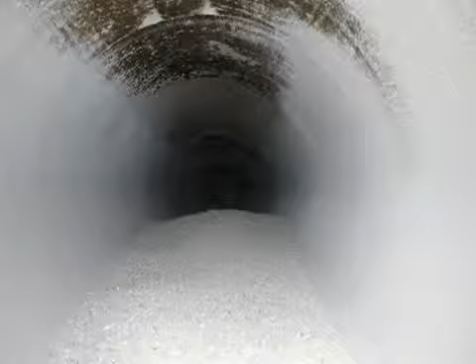Combustible dust fires and explosions continue to occur frequently, fueled by accumulations of combustible dust, which can gather over years in hidden places or in plain sight.

No company wants to see its facility blown up and destroyed and its employees killed, but they just don't understand what the hazard is. They don't realize that they have a hazard here until that one day when the explosion occurs, and it's a terrible tragedy for them. And they look back and say, if we'd only known.

When Tammy Miser got a phone call late one evening in 2003, she worried it would be about her brother, Shawn Boone, who worked at an automotive parts factory. We usually didn't answer the phone that late, but we knew when it kept ringing that there was something wrong, so we answered it.

There had been an accident there before, so I knew. I knew if they were calling me, it was my brother.

Shawn Boone was a mechanic at the Hayes Lemmerz plant in Huntington, Indiana. The company produced aluminum car wheels.

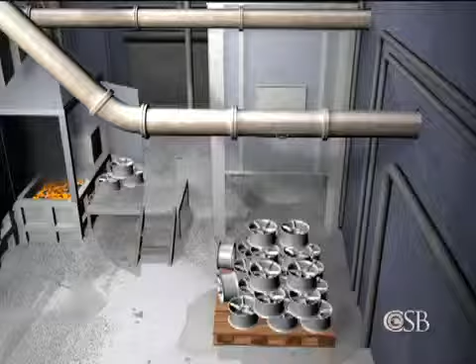The process of finishing the wheels left behind aluminum scraps, which were chopped into small pieces and sent to a furnace to be melted and reused.

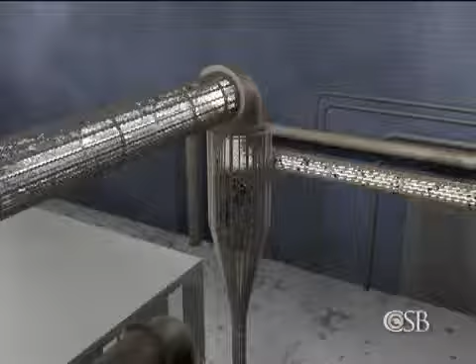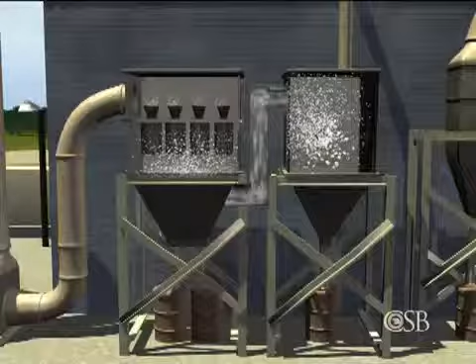Chopping, drying, and blowing the dry chips through the transfer piping created highly combustible aluminum dust, which flowed through ducting to a steel drop box outside the building, where large particles were trapped. The air then entered a dust collector, which removed finer aluminum particles.

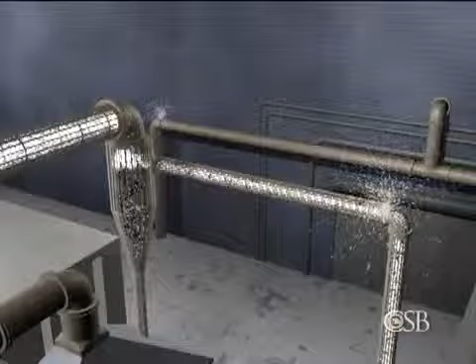Over time, aluminum dust accumulated inside ducts. In addition, there were leaks in the piping used to transfer aluminum chips, which caused dust to build up on surfaces throughout the furnace area. Aluminum dust landed on beams, ledges, and equipment. In some places, the dust was several inches deep.

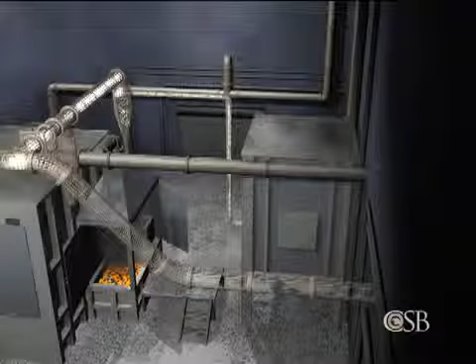On the night of October 29th, about 10 minutes after workers started the aluminum chip melting process, aluminum dust inside the dust collector was suddenly ignited, perhaps by a metal ember or impact spark, resulting in a large explosion.

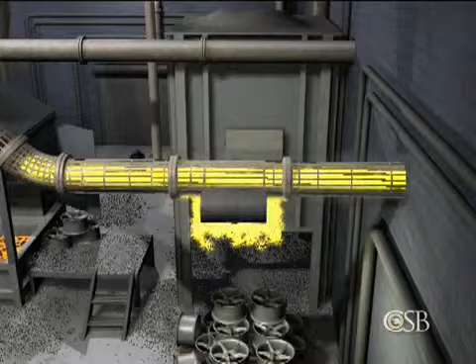The blast propagated back through the duct into the steel drop box, blowing it apart. The fireball and pressure wave continued back through the duct system into the building, gaining intensity as the accumulated aluminum dust ignited.

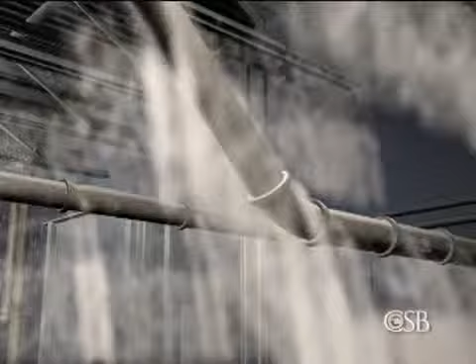The violent disturbance shook loose dust that had built up on external surfaces. At about 8:30 p.m., plant mechanic Sean Boone was one of several workers in the area of the furnace.

Without warning, a fireball erupted from the furnace, engulfing the area and igniting airborne dust in a second, larger explosion. The explosion blew a 50-foot wide hole through the roof of the building.

Co-workers found Sean Boone lying on the floor near the furnace, gravely injured. He was rushed to the hospital and put on life support.

And they told us that his internal organs were burnt, and they could take his arms, and they could take his legs, but he probably wouldn't make it, and it would just prolong it. So we went ahead and took him off.

Sean Boone was one of 14 dust explosion fatalities in 2003 alone.

Launching a comprehensive investigation into the hazard, the CSB held 2 public meetings, convening panels of experts and listening to extensive public comment. First, combustible dust is a real serious problem in all of general industry.

The CSB report concluded that good engineering and safety practices to prevent dust explosions have existed for decades, but there is no comprehensive federal standard requiring adherence to those practices. And many companies are not taking effective actions to control dust hazards.

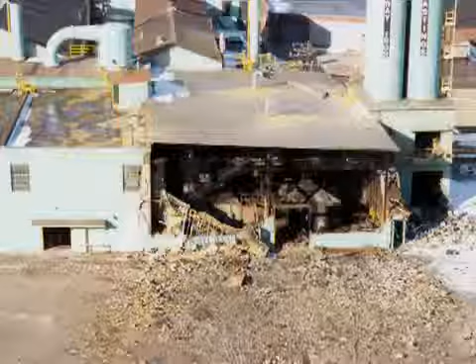Resin dust exploded at the Jahn Foundry in Springfield, Massachusetts in 1999, killing 3 workers and injuring 9 others. Rubber dust exploded at Rouse Polymerics in Vicksburg, Mississippi in 2002, leaving 5 dead. A nylon fiber explosion destroyed Malden Mills in Methuen, Massachusetts in 1995.

In fact, between 1980 and 2005, the CSB found at least 281 combustible dust fires and explosions that caused 119 deaths, 718 injuries, and major damage to industrial facilities.

Amy Beasley Spencer is a combustible dust expert at the National Fire Protection Association, or NFPA. Beyond the loss of life and the injuries, when you think about the economic impact of a dust explosion, you hear about plants being completely destroyed. There's loss of jobs. It's an economic impact on the entire community.

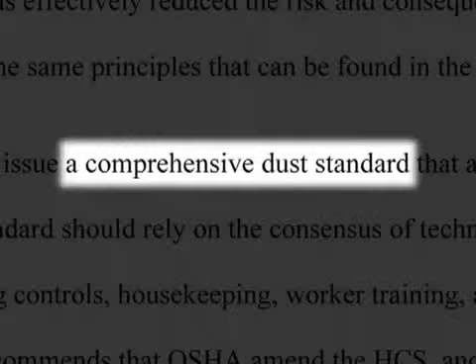The CSB report called on OSHA to establish a comprehensive regulatory standard designed to prevent dust explosions in general industry. The board said OSHA should base the new regulation on the current standards of the NFPA. These codes address hazard assessment, engineering controls, housekeeping, building design, explosion protection, operating procedures, and worker training.

The NFPA codes and standards have been in existence since the early 1920s, and there are 7 codes and standards that deal directly with dust. It's a tragedy to have even one loss of life because the technology is out there to prevent these dust explosions. In addition to the NFPA, the Center for Chemical Process Safety, as well as a leading insurance company, have developed recommended practices on controlling combustible dust.

The board also called for improved training of OSHA inspectors to recognize dust hazards. Interim CSB Executive William Wright explained the recommendation before the House Committee on Education and Labor in March 2008, citing 3 dust explosions the CSB had investigated in 2003.

State OSHA officers had inspected all 3 facilities prior to the accidents, but the dust hazards were never recognized or cited. Furthermore, the CSB determined that all 3 explosions could likely have been prevented if the facilities had implemented NFPA recommended practices.

In addition, the board recommended that OSHA revise its hazard communication standard to ensure that material safety data sheets better communicate dust hazards to workers.

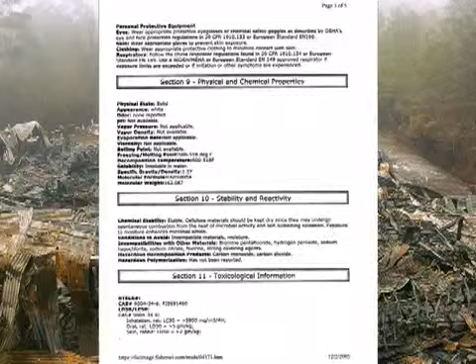In response to the CSB's recommendations, in 2007, OSHA increased the enforcement of existing regulations through a new national emphasis program on combustible dust. Without a comprehensive standard for combustible dust, it's difficult for businesses to know which specific NFPA provisions or other requirements they may be subjected to.

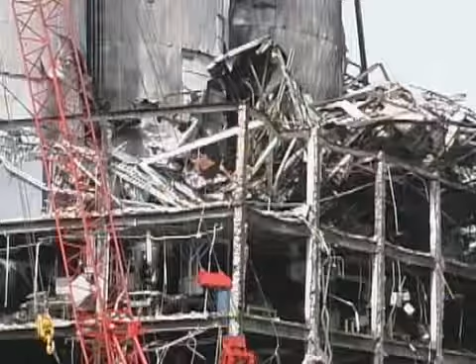The explosions, tragically, continue. The list includes the blast that crippled the Imperial Sugar Refinery outside Savannah, Georgia, in February 2008. Since 2005, about 70 additional dust explosions have been reported. And in fact, the Imperial accident last month is the deadliest industrial dust explosion in the United States since 1980.

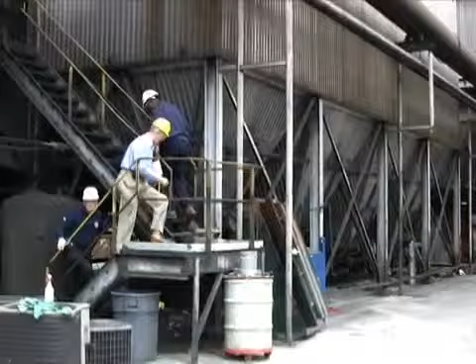CSB Chairman John Bresland: I toured the facility about 6 weeks after the explosion. The damage that was done there was catastrophic. As you walk around the facility, you think of the people who were working there that day, who were killed and severely injured. It was a difficult experience to walk around that facility. It was a very sobering experience.

What is so frustrating about dust explosions is that they're so preventable. And I believe that one of the reasons that dust explosions continue to occur may simply be a lack of understanding about the materials.

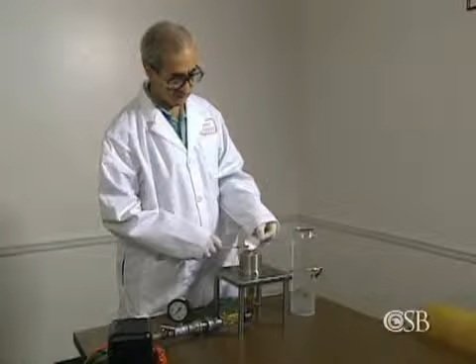Most solid organic materials will explode if the particles are small enough and they're dispersed in a sufficient concentration. Some of the materials that could form combustible dust, and there are lots of them, could include coal, sawdust, food products like sugar and flour, pharmaceuticals, many chemicals, and even many metals.

Like all fires, a dust fire requires fuel, oxygen, and an ignition source. A dust explosion requires two additional elements: dispersion and confinement.

The CSB commissioned laboratory tests using a sample of fine polyethylene dust found by investigators in the rubble of a North Carolina factory. Dust is dispersed into a flame, creating a fireball.

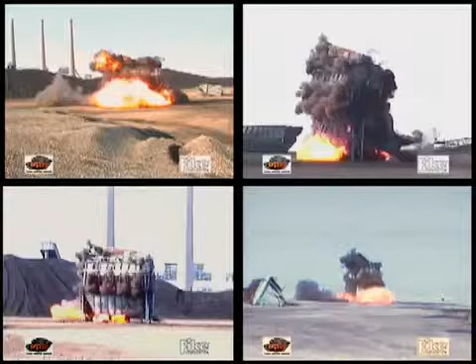When the dust is confined within a structure or a piece of equipment, a powerful explosion can occur and propagate, as this coal industry video demonstrates.

Dust may accumulate on surfaces and lie undisturbed for years. Then some initial fire or explosion, known as a primary event, shakes it loose and ignites it. It causes a pressure wave to go through the plant, dislodging dust that has accumulated unknown up on the rafters, on the beams, on the tops of equipment, serving as fuel.

Most of the fatalities and the devastating injuries have been caused by these secondary dust explosions.

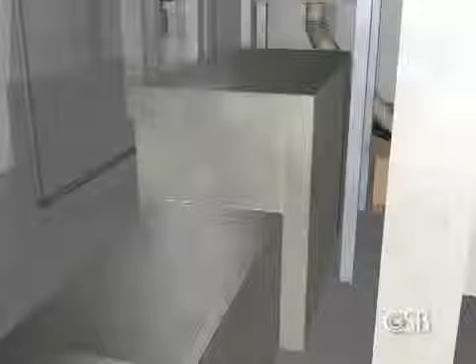According to the NFPA, a catastrophic explosion can occur from as little as 1/32 of an inch of accumulated dust, around the thickness of a dime, covering just 5% of a room's surface area.

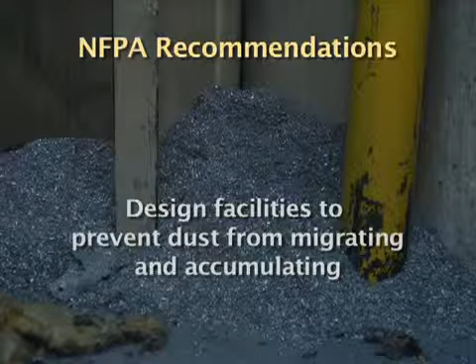The NFPA therefore recommends that companies control fugitive dust emissions, design facilities to prevent dust from migrating and accumulating, and perform rigorous housekeeping to remove any dust that does build up. The NFPA codes have been adopted either at the state level or in some cases at the local level, at the city level. But the problem is they're not enforced in any regular way.

A catastrophic dust explosion at the West Pharmaceutical plant in Kinston, North Carolina in 2003 reveals what can happen when companies do not properly assess the hazards from combustible powders and do not design their buildings and equipment appropriately.

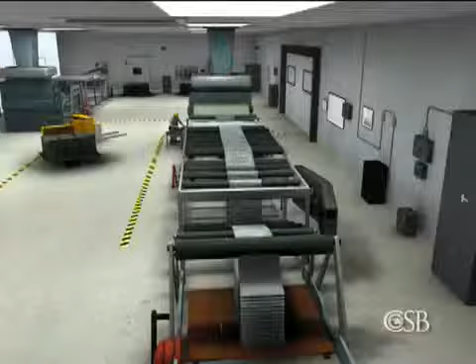West Pharmaceutical made small rubber medical products, such as syringe plungers and stoppers, at a large manufacturing facility with nearly 300 workers. In the process, large batches of rubber were compounded and rolled into long strips.

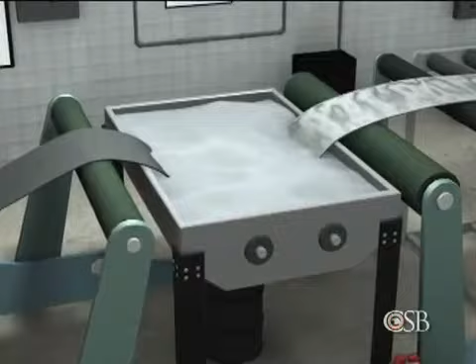To keep these strips from sticking together, they were dipped in a vat containing a whitish slurry of water and finely powdered polyethylene, a petroleum-based wax-like plastic. The coated rubber strips were then blown dry with fans and folded for later processing.

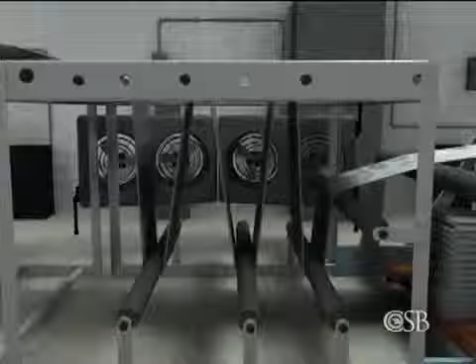As the rubber sheets dried, combustible polyethylene dust, which was not visible to workers but is colored white here for illustration, was blown into the air.

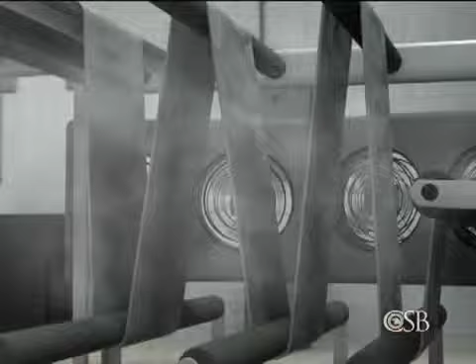Over the years, the air conditioning system drew polyethylene dust into the hidden space above an acoustic tile ceiling that was suspended over the production area. There, the dust gradually built up to a thickness of up to 1/2 inch on ceiling tiles, beams, conduits, and light fixtures, just a few feet over the heads of unsuspecting workers.

January 29th began as a routine workday at the West plant. But at about 1:28 p.m., a small fire or explosion occurred somewhere near the production area.

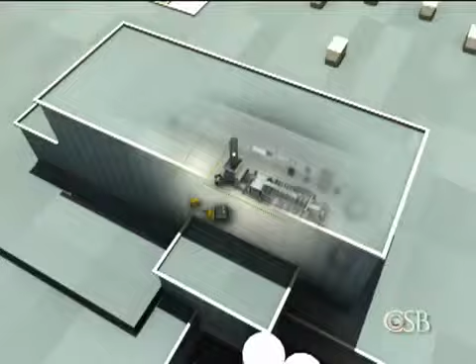It lofted the accumulated dust above the ceiling into a thick cloud, which then ignited in a much more violent secondary explosion.

Some employees described a sound like rolling thunder as the dust explosion spread throughout the space above the ceiling and ripped through the building. The accident at West Pharmaceutical Services took the lives of 6 employees and injured 38 others,

including 2 firefighters. The thing that set up the tragedy at West was the mere accumulation of hazardous dust above a ceiling.

The NFPA code says that any openings where dust could accumulate must be sealed. The solution would have been to either seal it or to not have a suspended ceiling.

Another cause of the West accident was that workers were not informed of the dust explosion hazard arising from the polyethylene slurry, a fact that should have been included on the material safety data sheet.

At West Pharmaceutical, the dust wasn't well recognized as a hazard because it was actually in a slurry form. So the actual processing of the slurry, the drying of it, created the dust, and the dust migrated above the suspended ceiling. Cleaning above the ceiling was overlooked in West's otherwise rigorous housekeeping program.

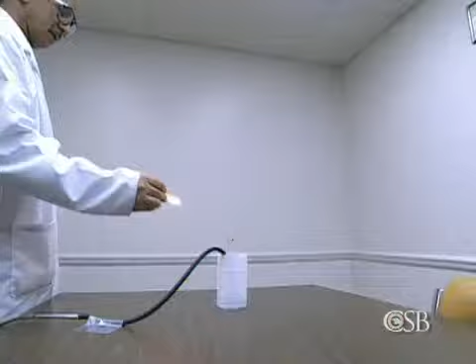Jim Dahn is a leading expert on combustible dust. If you've got a dust, you need to know what the ability of that dust is to explode, and to characterize that dust in terms of: does it take a little energy or a lot of energy to ignite it? Will this dust, when it explodes, create a very major overpressure? Those are the things that need to be on an MSDS.

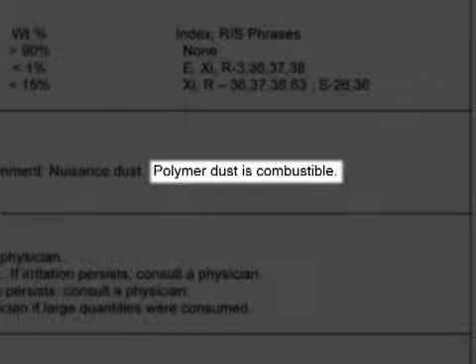The CSB found that the problem of inadequate MSDSs is widespread. Of 140 MSDSs for combustible powders, the CSB found that very few included adequate dust explosion warnings or referred readers to the appropriate NFPA standards. There needs to be better communication to workers on the issue of combustible dusts, and that should be done through improved information on material safety data sheets.

Less than a month after the West Pharmaceutical accident, a fatal dust explosion crippled the CTA Acoustics plant in Corbin, Kentucky. The disaster at CTA, which claimed 7 lives, illustrates the critical importance of following NFPA recommended practices to control dust hazards.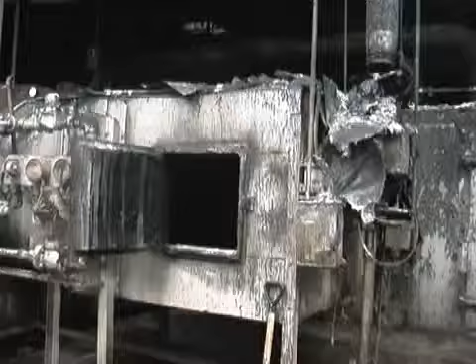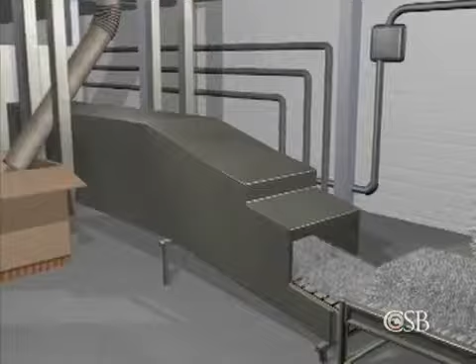The CTA facility, with more than 500 personnel, produced fiberglass acoustic insulation for automobiles. Covering 300,000 square feet, it had 5 production lines. At line 405, fiberglass was fed along a conveyor system and spread to create a web.

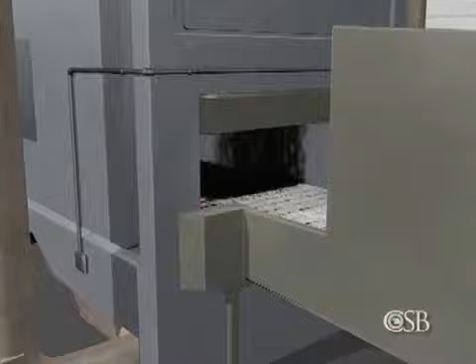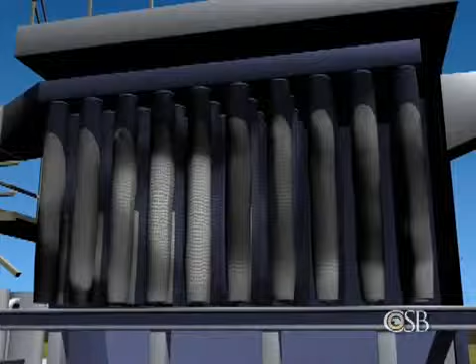Black phenolic resin powder was deposited onto the fiberglass. Hundreds of thousands of pounds of the combustible resin powder were used in the plant every month. Next, the mat former used air suction to spread the resin through the fiberglass. Excess powder and fibers were drawn up into a dust collector and rapidly accumulated on long cloth bags. After the mat former, a nylon facing was rolled onto the fiberglass before it entered a gas-heated curing oven.

Combustible resin accumulated in the oven, resulting in frequent small fires that were extinguished by workers. During each shift, the line was shut down for cleaning.

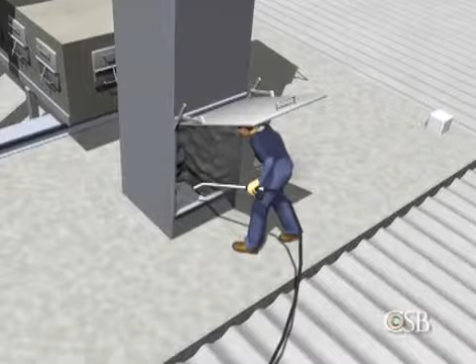On the roof, employees routinely used compressed air to dislodge dust that had built up in the ductwork, dumping the material into a large open box on the production floor. On the production line, workers also used compressed air to blow dust off equipment.

They swept the production floor with brooms. These cleaning activities created dust clouds so dense that large fans were used to blow the dust away from the operators. This increased the dispersion of dust in the plant.

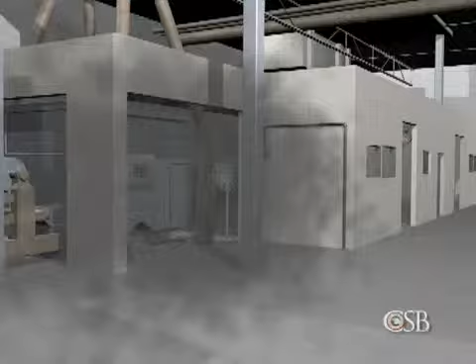The dust settled on horizontal surfaces throughout the entire production area. Over years of operation, dust built up on top of pipes, electrical conduits, and other hard-to-clean elevated surfaces such as roof trusses. A pile of resin dust more than a foot deep had built up on top of the blend room due to periodic cleaning of clogged equipment.

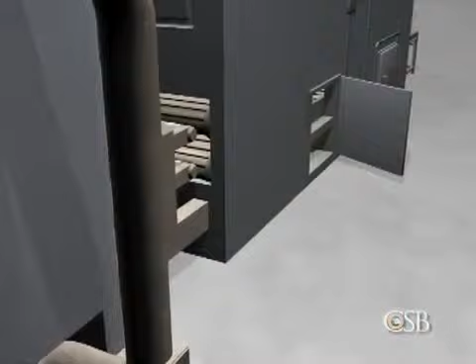On the morning of February 20th, 2003, production line 405 was shut down for routine cleaning. The oven was still on, with one of its doors left open to control the temperature because the oven thermostat had broken weeks earlier. CSB investigators later determined that most likely a small fire, unseen by workers, had started inside the oven, fueled by a buildup of combustible resin.

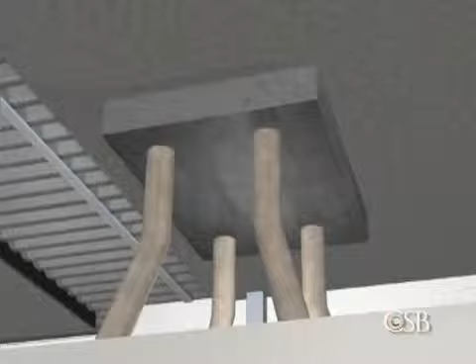During cleaning, workers had discovered that a transition duct leading from the mat former to the dust collector was clogged. They used a compressed air lance to dislodge the material back through cleanout doors into the production area. Together with other cleaning activities, this created a dense dust cloud around line 405.

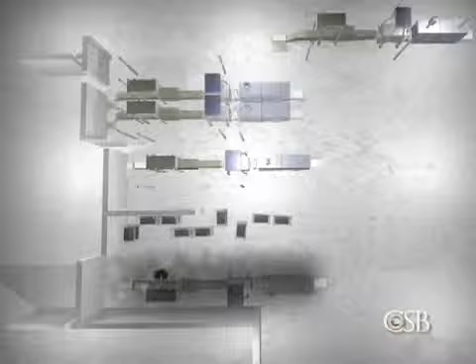A wall fan blew the cloud toward the open oven. The dust was ignited by the small fire inside. Flames erupted from the oven, igniting the larger dust cloud, which exploded. This was quickly followed by a second dust explosion at the other end of the production line.

4 employees nearby were injured. 1 later died from severe burns. The force of the 2 explosions shook the building and dispersed accumulated dust throughout the production area.

This airborne dust fueled a quickly moving fireball, spreading west along the roof trusses toward production line 403, which was also surrounded by dust. 4 workers in this area were fatally burned. The fireball continued past line 402, fatally injuring 2 more workers, and then to line 401, where a third explosion occurred nearly 300 feet from where the first blast was ignited. 3 workers in this area were severely burned.

The 4 production lines were not adequately segregated, and this allowed the dust explosion to very quickly travel from one production line to the next to the next. And in this case, most of the employees who died were actually working a far distance from where the initial fire began.

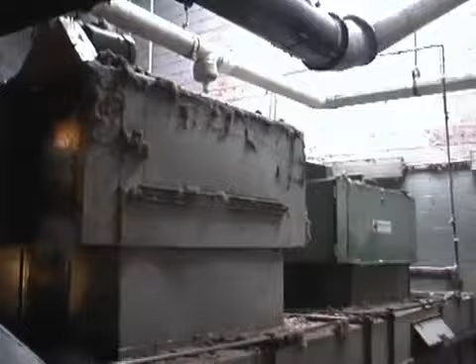NFPA recommends minimizing horizontal surfaces where dust can collect, but the CSB found that this was not done at CTA. At CTA Acoustics, there were many actions being completed that were prohibited in the NFPA codes and standards.

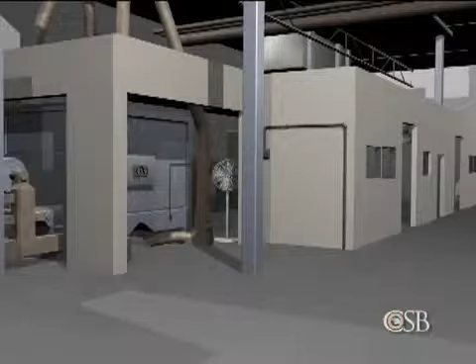For instance, if you're using compressed air, that can create more dust in the air to cause a larger fuel load for the actual explosion. CTA personnel also used brooms and fans to clean the production lines, which dispersed dust throughout the building. NFPA standards emphasize the use of safe cleaning methods, such as vacuuming with specialized equipment.

In normal, routine, daily housekeeping, workers address the working and walking surfaces in their production areas. They address their equipment, the places that they can see. But when it comes to preventing dust explosions, much more is needed. You have to clean in the out-of-the-way places, up near the rafters.

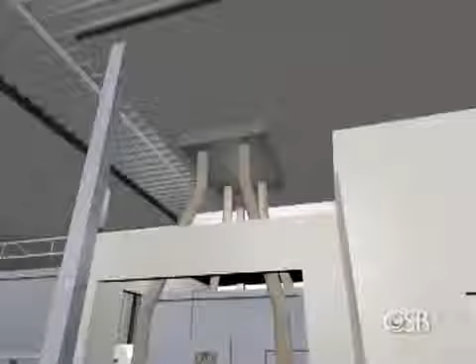You also don't want to over-rely on housekeeping, because if you have housekeeping round the clock and you're still seeing layers of dust, you might want to look at your system to see why that dust is being produced in the first place. The CSB also found the material safety data sheets for the phenolic resin powder used at CTA

did not adequately warn of the dust explosion hazard. Kentucky State Fire Inspectors had not visited the facility since its construction in 1972. Insurance companies had inspected the plant on multiple occasions, but never identified the dust hazard.

Neither had state authorities. We found that Kentucky OSHA had, in fact, inspected this facility not long before the explosion, yet they had not uncovered the combustible dust hazard. We further learned that they had not received specific training to be able to detect this deadly hazard.

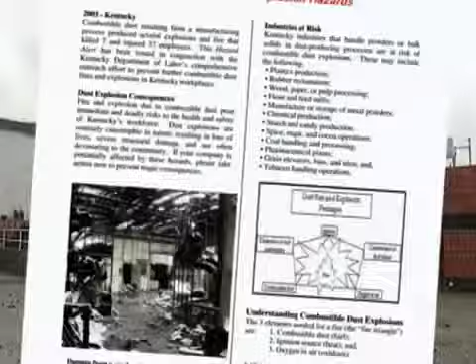Following the CSB investigation, Kentucky officials established a new program to inspect facilities with dust hazards and developed an educational bulletin on dust, which was distributed to thousands of facilities.

There's been a big explosion at one company.

Why do these accidents keep occurring is the age-old question. The knowledge is out there to make sure that no deaths occur due to dust explosions.

I think the big problem with combustible dust is that we underestimate its hazards. We become complacent and we fail to take the necessary precautions.

But it's not going to happen in my plant, because it never happened that way before. I mean, we've been operating for 40 years and never had a problem. That kind of logic is one that can guarantee you to get into trouble.

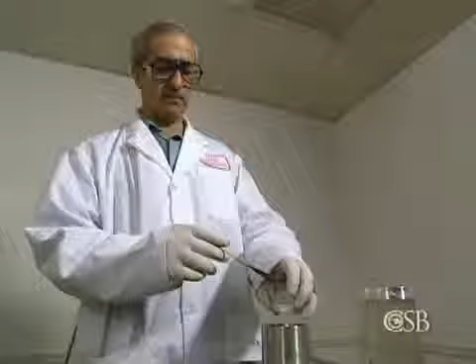Any material that they have in their process in a dust form should be tested to determine if it is a dust explosion potential or not.

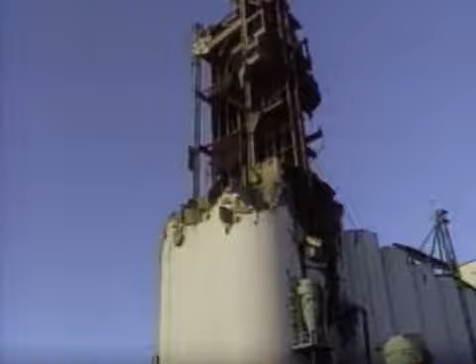In the 1970s and 80s, the U.S. experienced a series of grain dust explosions that killed many people. OSHA responded with new regulations in 1987 requiring preventive maintenance, worker training, and formal dust cleaning programs in grain handling facilities. A 2003 OSHA analysis concluded that the number of deaths from grain dust explosions had dropped dramatically.

OSHA has a specific standard for grain dust, and that's been a very successful standard, and it has significantly reduced the number of accidents involving grain dust. I believe if there were a national OSHA requirement dealing with dust explosions, that the incidents would be significantly decreased.

In April 2009, Secretary of Labor Hilda Solis announced plans for a comprehensive regulatory standard. Where workers are in danger, where mandatory regulations make sense, we will act and we will implement. And I'm announcing today that OSHA will begin the rulemaking on combustible dust.

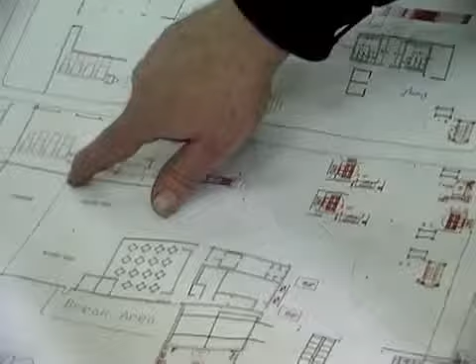What I feel that we need to do to prevent combustible dust explosions is threefold. We need education, we need industry to understand what the hazards are. We need regulation, we need a comprehensive combustible dust regulation, and we need enforcement of the regulation. And I feel if we do all three, we'll go a long way to preventing these terrible tragedies that we're seeing with combustible dust explosions.

The only way to keep my brother from dying in vain would be to make changes. And if there's not a change made, well, then it's going to happen again.

I hope that people who watch this video will take the lesson that they really need to do something to prevent combustible dust explosions. For more information on combustible dust, please visit csb.gov.